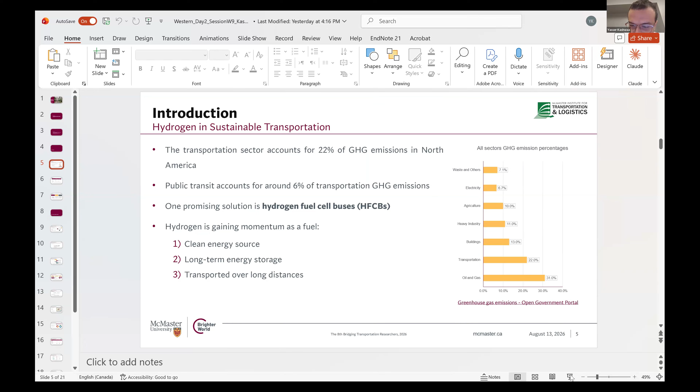Sir, if you wouldn't mind, could you share your video just so we can see you when you're presenting? Okay. Perfect, okay, yeah, continue. Okay. Is my screen appearing now? You'll just have to go into full screen mode again. Okay, yeah. Now it's appeared? Yep, yeah, okay, go ahead.

As we see in the figures, transportation accounts for 22% of greenhouse gas emissions in North America, with public transit accounting for 6% of transportation greenhouse gas emissions. So rapid actions are required, and one promising solution is hydrogen fuel cell buses. Why hydrogen? Because hydrogen is a clean energy source, it can be transported over long distances, and it can be stored for a long term. So hydrogen fuel cell buses are often viewed as a promising option for decarbonizing transit service.

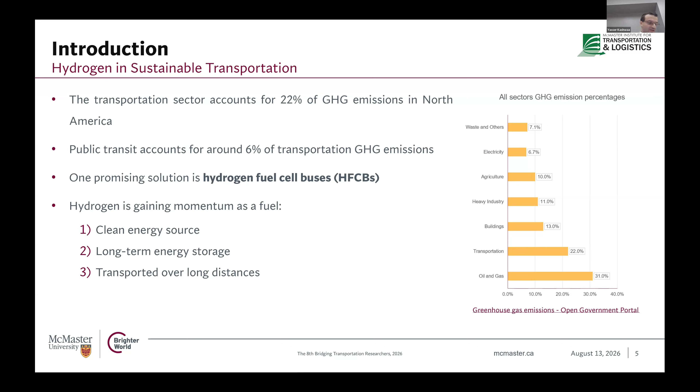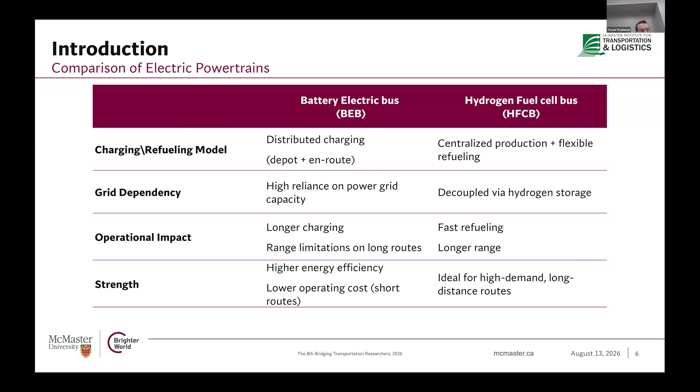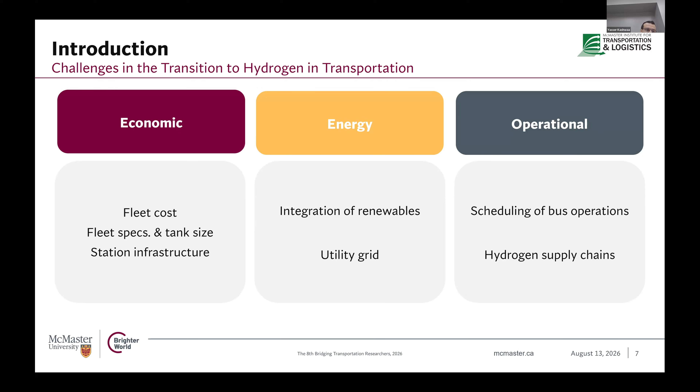In terms of powertrain comparison, battery electric buses require distributed charging depots and sometimes en route charging, and can be constrained by grid capacity and longer charging time. On the other hand, hydrogen fuel cell buses can use centralized production and flexible refueling with faster refueling, suitable for high demand and long distance routes. But transitioning to hydrogen in transit systems faces several challenges, classified as economic challenges, energy integration challenges, and operational challenges, mainly on supply chain coordination and bus scheduling.

That brings us to a multi-depot hydrogen system, a real transit network with multiple depots. We face several planning questions: where should hydrogen be produced, centralized or decentralized? Centralized means producing hydrogen on-site at one depot and transporting it to other depots; decentralized means each depot has its own on-site hydrogen production. Another option is to import hydrogen from an external market. If we go with on-site production, how large should the electrolyzer and storage be?

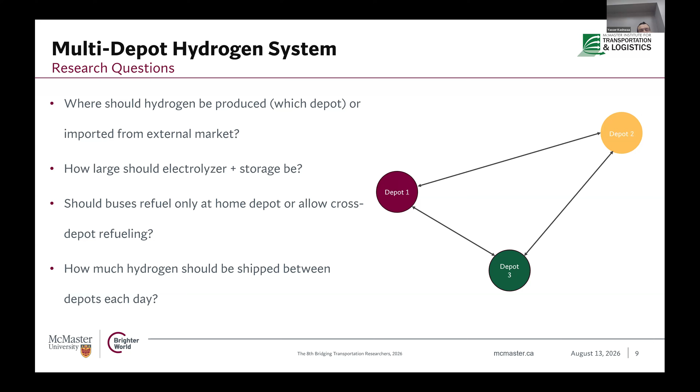Another question: should all buses refuel at their assigned depot, or allow cross-depot refueling? How much hydrogen can be shipped between depots each day if we suggest centralized production? To answer these questions, we addressed them in our journal paper titled 'An Optimization Framework of Hydrogen Fuel Cell Buses in Multi-Depot Urban Transit Network.' In this paper, we developed a mixed integer linear programming framework that jointly optimized depot production, storage, refueling strategy, and inter-depot transport, aiming to minimize total annual cost while meeting daily service demand.

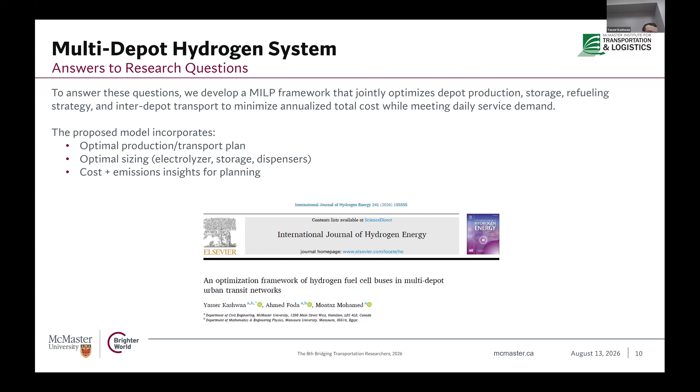The framework is designed to support integration of hydrogen fuel cell buses with multi-depot transit systems. This paper is also applied to a case study of Halifax, with 5 different configurations evaluated and compared. One key configuration is centralized hydrogen production, where one depot acts as a production hub with electrolyzer and storage, and other depots primarily serve as demand nodes that refuel buses. We then optimize when and how much hydrogen to transport between depots so that refueling demand is met reliably without shortage, while minimizing total system cost.

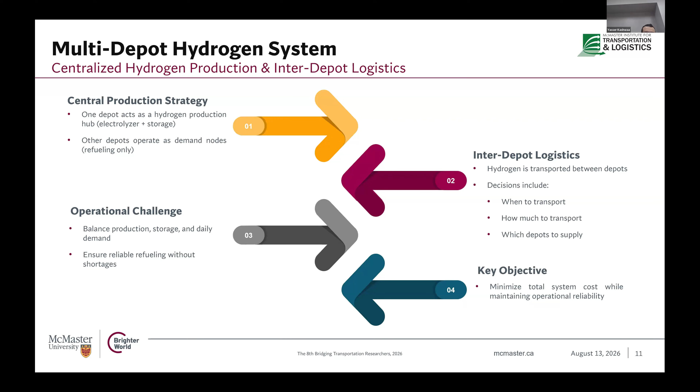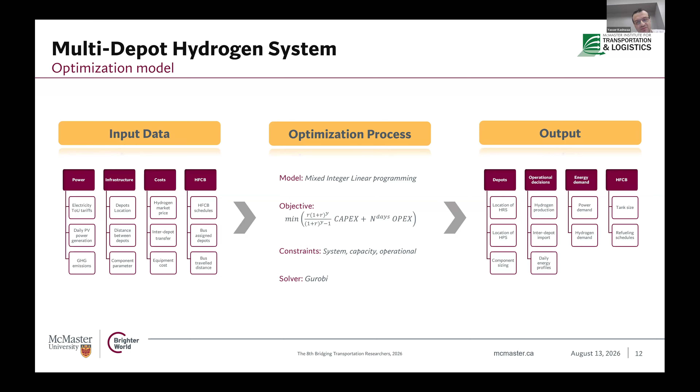Finally, the model generates the output, which identifies which depot serves as hydrogen production and which serves as a refueling hub. It also determines the optimal infrastructure sizing, including electrolyzer and storage and dispenser, and the number of dispensers required, as well as operational decisions such as daily power demand, hydrogen production levels, inter-depot hydrogen transfer, and bus refueling strategies.

The optimization model aims to minimize the total annual cost, including capital cost. The capital cost represents the total investment cost, including infrastructure cost and hydrogen fuel cell bus cost, while operational

cost included four main cost categories: electricity cost, the social cost of greenhouse gas emissions, the electrolyzer operational cost, and inter-depot transportation cost.

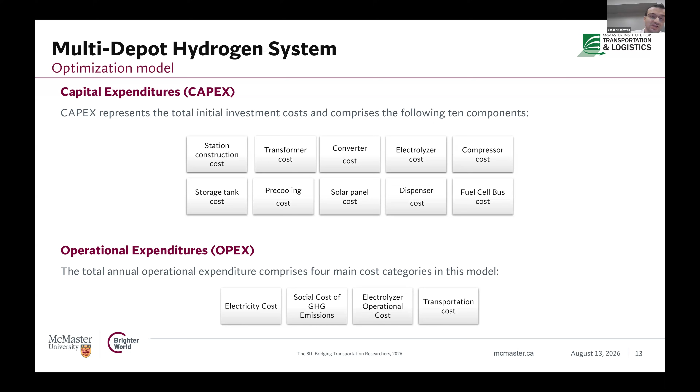We apply our model to a case study of Brampton. The data is extracted from GTFS, with around 5,000 daily trips served by 570 operating buses. In Brampton, we have 3 depots: Sandalwood, Clark, and Cadetta.

In this study, we consider the electrification of 10% of the bus fleet using hydrogen fuel cell buses, allowing us to evaluate system performance under partial transition scenarios.

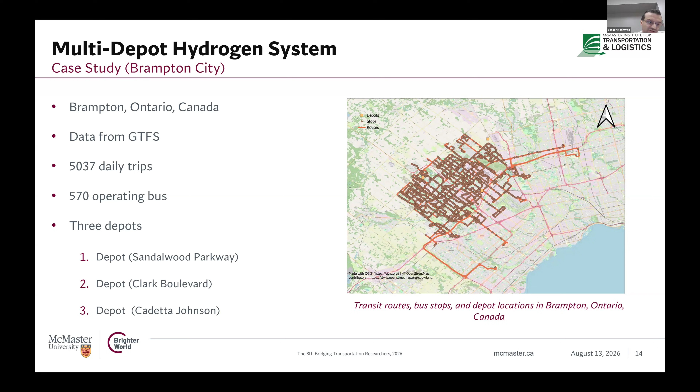Now we will head to the results. We see that the total annual cost is around 12.5 million dollars, with annual capital cost about 8.4 million dollars, and annual operational cost around 4 million.

We see that the bus cost is the largest CapEx driver. In the CapEx distribution, if we exclude the bus cost, the electrolyzer accounts for around 40.7% of the annual capex cost, and the transformer is the second highest with 30.7%.

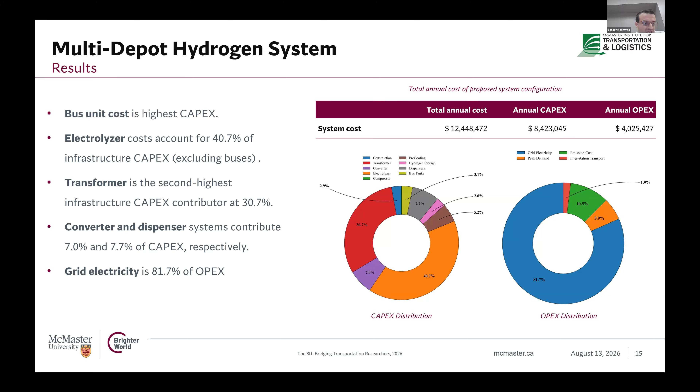On the operational side, we can see that grid electricity dominates the operational cost, with around 81.7% of total operational cost. So overall cost is heavily influenced by CapEx, vehicle cost, and grid electricity dependence.

Here are the optimal configuration of our system. The model chooses Sandalwood as the production depot. Sandalwood has 26 assigned buses. It produces daily around 1700 kilogram of hydrogen, and it exports 630 kilogram to the first depot, called Clark, and 280 kilogram of hydrogen to depot Cadetta.

From a cost perspective, we can see that the model is highly dependent on electricity for on-site hydrogen production, with an electrolyzer around 4 megawatt capacity. We also see that relying on the electrical grid is more cost effective than using other power sources like on-site solar generation.

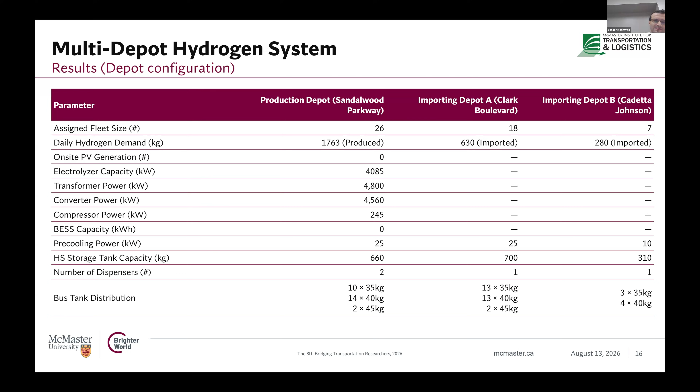This is due to the high capital cost related to the PV panels, and also the large space required, which would be restricted at the depot. The model also determines the optimal tank size for each bus, which ranges from 35 kilogram to 45 kilogram for bus tank size.

For the importing depots, there is no local hydrogen production, as shown by a flat electrolyzer line. Instead, hydrogen is delivered through import events for both depots. For the first depot it's around 3 p.m., and overnight at 10 p.m. for the second depot, in order to fill the storage and refuel the buses overnight when they finish their services.

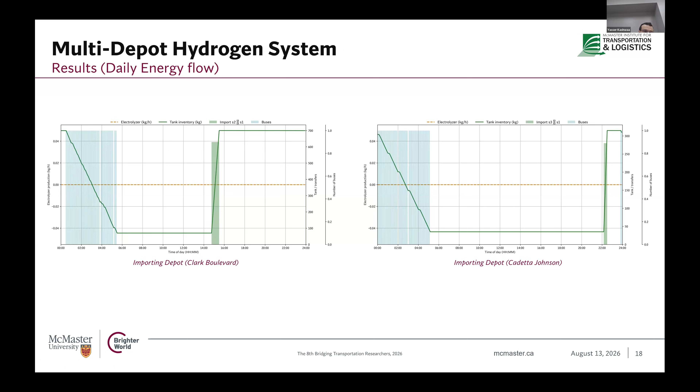To conclude, centralized hydrogen production can be economically beneficial in a multi-depot transit system. In our Brampton case study, Sandalwood Parkway is selected as the optimal production hub, producing around 1700 kilogram of hydrogen using a 4 megawatt grid electrolyzer.

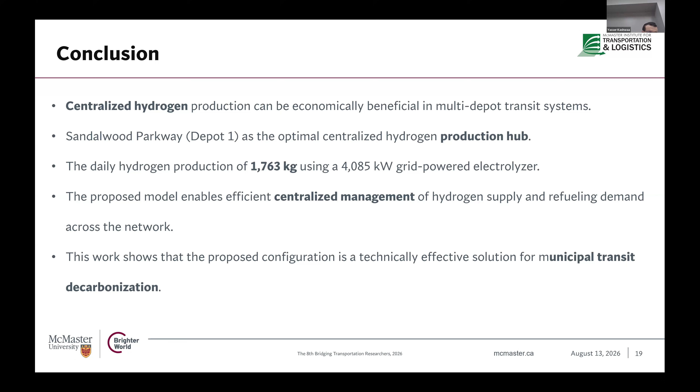The proposed model enables efficient centralized management of hydrogen supply and refueling demand across the network, and it demonstrated a technically effective solution for municipal transit decarbonization.

From a planning perspective: first, centralized hydrogen production can be cost effective, but remains strongly dependent on grid infrastructure. Second, PV powered on-site production requires significantly high capital cost and large land area, which can be limited in urban depots. Third, the primary barrier remains the high capital cost of the hydrogen fuel cell bus itself. Overall, optimization frameworks can support deployment decisions, station siting, sizing, power and energy management, and bus configuration in terms of optimal tank size and refueling patterns, aiming to minimize the total annual cost of electrifying the transit network.

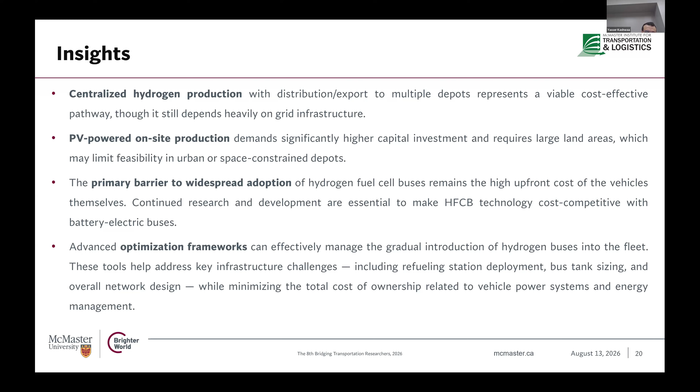And that concludes my presentation today. Thank you for your time, and I'm happy to take any questions.

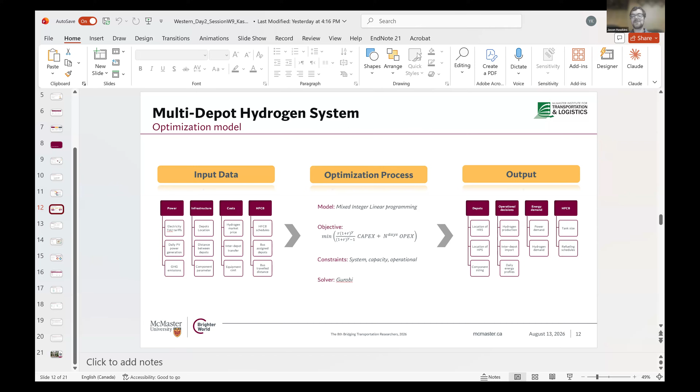Thank you for your introduction. Can you see the screen? Yep, whenever you're ready, go ahead. Sounds good. So somehow the program says I'm from Carnegie Mellon, but actually I'm from University of Michigan. My name is Miki Tsuchiya. Thank you so much for having me here.

So today I would like to talk about long haul trucking in the United States. Long haul trucking vehicles run routes from 150 miles to over 3,000 miles across the continent, which is quite long for a driver to complete. The vehicle itself is very heavy, one of the largest on the highways, carrying 10 to 20 tons of payload—a very heavy vehicle running quite long distances.

These vehicles are facing two emerging trends: electrification and automation. I would like to talk about these trends in this study. First, electrification is needed for the sector's decarbonization, but long haul trucking accounts for only 9% of medium and heavy duty vehicles by fleet size. However, it accounts for around half of medium heavy duty vehicle GHG emissions. This translates into 10% of transportation emissions in the US and 3% of the country's total GHG emissions. So we can say it is critical to address emissions in this sector.

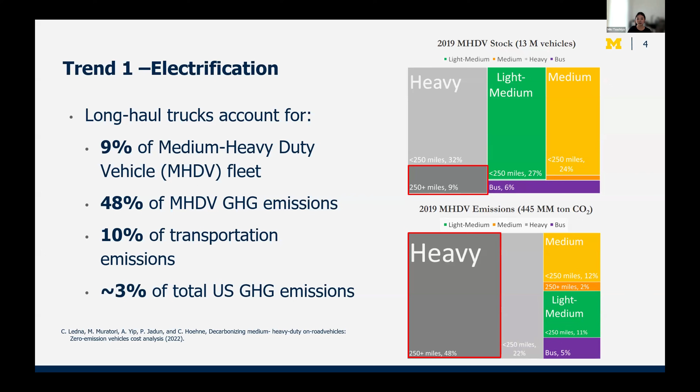Past studies have discussed and proven that electrification can reduce GHG and air pollutant emissions. However, it is generally considered very challenging to electrify these huge vehicles or trucks because it is very expensive and physically heavy. Batteries are required to compete with the 800-mile range of diesel trucks, and charging infrastructure is limited on highways for heavy-duty vehicles to access in the US.

However, the market is rapidly expanding in this area. For example, Tesla Semi covers a 500-mile range with a single charge. So the market is leaning towards electrification despite these challenges.

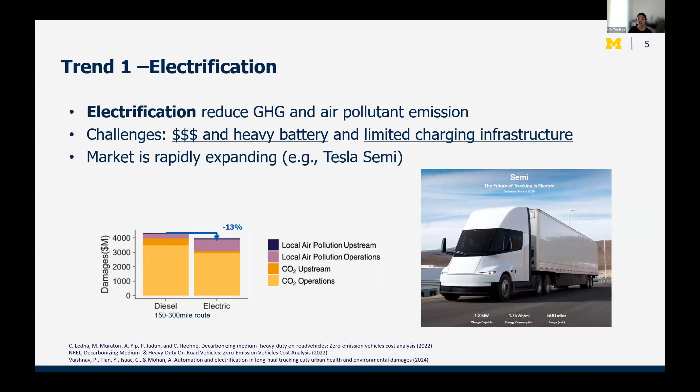So the second trend is automation. When we say automation, we refer to driverless full automation. The automated truck will remove human labor needs, which will sharply reduce cost because around 40% of trucking cost is currently human labor. We can also increase trucking productivity because machines do not have to rest like humans, who are mandated to rest for about 10 hours after a 14-hour shift. So operation cost and productivity will be improved.

However, there might be a trade-off with productivity because automation may remove the opportunity of overnight charging, like charging while drivers are sleeping overnight. So in this study, we would like to combine slow trucking, just driving slower, to see how we can maximize the benefit of automation and electrification of trucking.

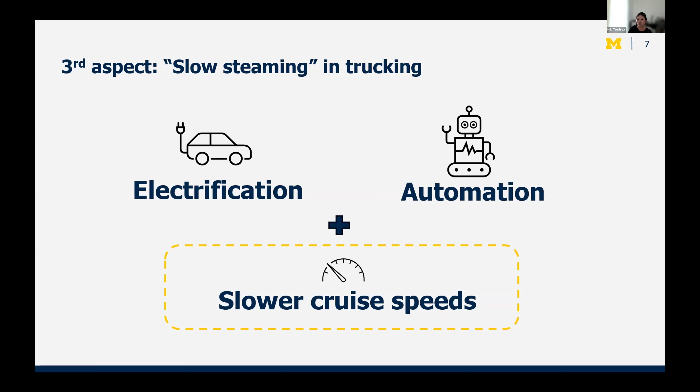So yeah, it's happening. Slow steaming is a term originally from the ocean shipping industry. That industry applied the operation of slowing vessels down to keep fuel emissions reduced, and they've successfully kept emissions constant over the decades, even as trade expanded by plus 40%. Bigger trucks are also speed-dependent, like vessels.

So combining this concept with automation and electrification might increase fuel efficiency or EV range and reduce emissions or environmental impacts.

When I present this study to colleagues or fellow researchers, people worry about the risk of crashes. If you go slower than other vehicles, can that increase the risk of crashes? Some studies have looked into this and shown it's likely to increase the risk of crashes if you go too fast compared to other vehicles. However, it's inconclusive in the case where we go too slow compared to other vehicles. We think it may end up being safe to operate these trucks slower because we assume there are no drivers on board. So we leave this discussion as a limitation and proceed with analysis based on fuel economy and productivity.

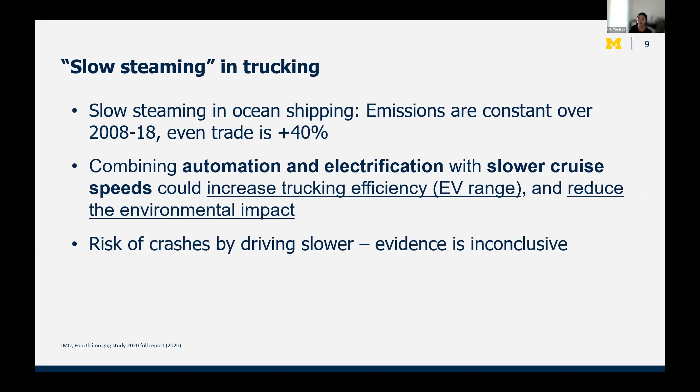So in the study, we address three research questions. One, can slow trucking increase EV driving range? Second, can automation compensate for the extra shipping time caused by going slower? Third, how much environmental and health damage can we reduce?

In our research, we assumed automation only on highway routes. The truck coming from urban roads enters a truck port, trailers are swapped to an automatic one from a human driver, and then completes the highway segment without human drivers. At the exit of the highway, we swap back the trailers, and human drivers complete the rest. This is because the urban segment is more complicated and less feasible for automated machines to complete in the near-term future.

We also compared a driving profile of 60 mph as a regular highway speed, testing 45 mph as a slow speed, since this is just above the minimum speed limit for trucks in many parts of the US.

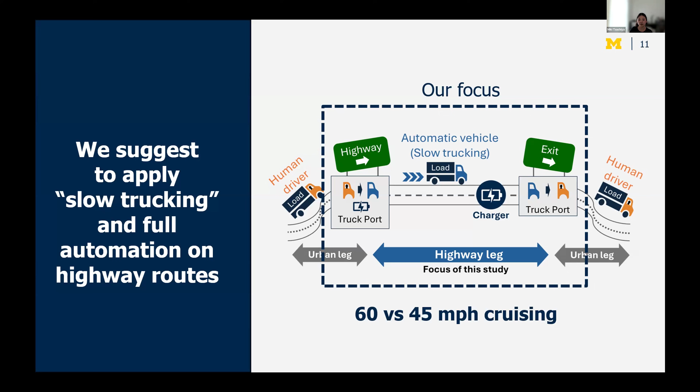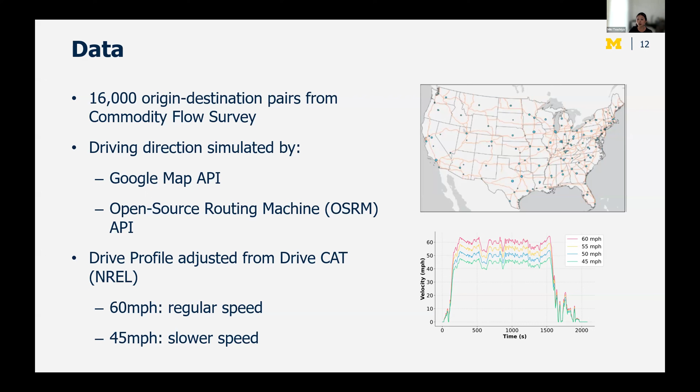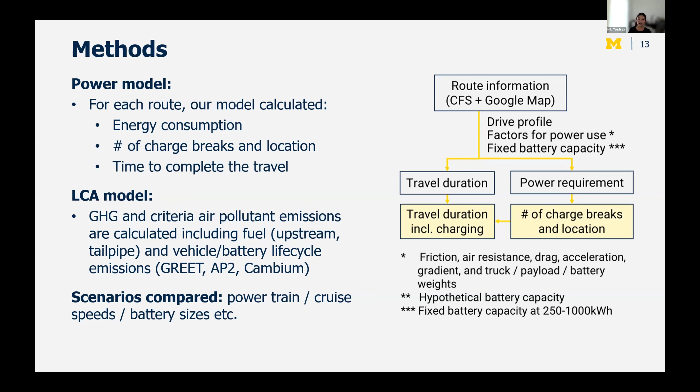We used real-world trucking routes and ton-mile shipping data obtained from the Commodity Flow Survey. We identified 16,000 origin-destination pairs, and using the Google Maps API and open source routing machine API, we got exact GeoJSON data for the trucking routes. We applied the DriveCAT driving profile to these routes. For each route, we developed system modeling to calculate energy consumption, number of charge breaks and their location, and time to complete the travel. We also used the LCA method to calculate GHG and air pollutant emissions in monetary value, considering upstream, tailpipe, and lifetime emission stages.

Okay, now I'll show you some of our results. We modeled with a 500 kilowatt-hour battery how many charge breaks a truck needs for each route with various lengths.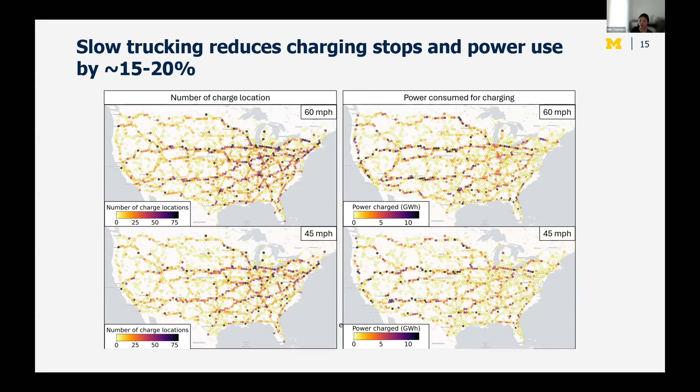We can see that slowing down can reduce the overall charging demand. The bottom two maps are slightly lighter in color compared to the top two. Overall the color is lightening, but we can see a slight shift in the location of highest demand. Some parts are lighter while others get darker when going slower, which we found interesting.

Let's move on to duration or productivity. We compared three scenarios: human drivers with diesel trucks, and automated electric trucks cruising at 60 mph and 45 mph. The human scenario includes rest periods, like an overnight 10-hour shift resting after a 14-hour shift. Electric trucks include charge breaks as needed.

The result shows that automated trucking is mostly faster than human drivers for routes longer than 650 miles, shaded in the green or blue boxes. This accounts for 60% of annual ton-miles shipped, so more than half. This is true whatever the speed is—even going slower, it's still faster than human-operated diesel trucks including rest. So we can say trucks can be automated, electrified, and slowed down without losing any productivity for those routes.

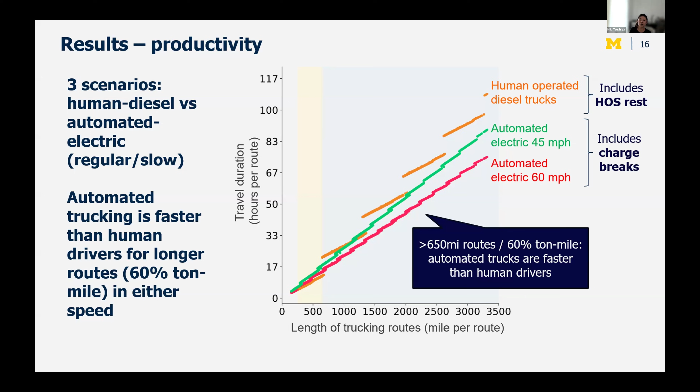For those routes, we can discuss the trade-off of truckers giving up some productivity gain to get fuel economy or environmental benefits, which we'll discuss in the next slide.

The GHG and criteria air pollutant emissions are shown here. We compared the same three scenarios from the previous slide, and found that electric trucks emit lower GHG than diesel, and slowing the truck can further reduce emissions. For total externalities, the reduction can sum up to 800 million at 60 mph compared to diesel trucks, or 2.4 billion at 45 mph—more than 1.5 billion in additional gains by going slower.

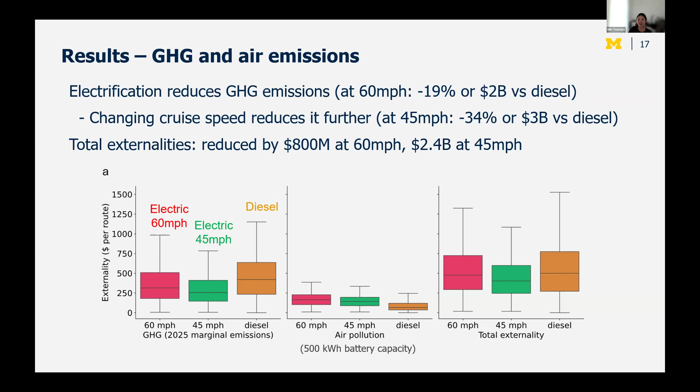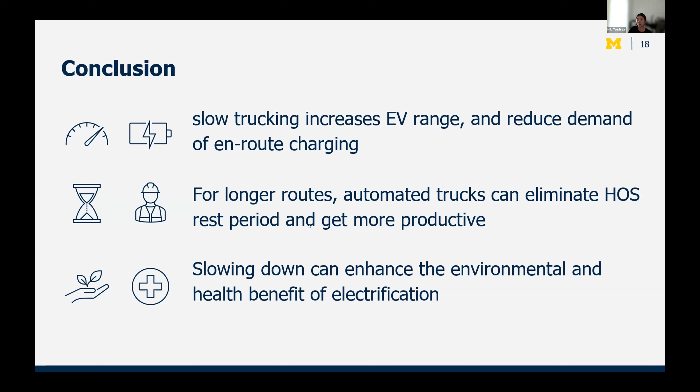This is the last slide. In terms of policy, our study has shown that automation alone on highway trucking can improve productivity and reduce operator costs for longer routes. Trucking operators may give up some of these productivity gains by going slower to reduce environmental and health externalities, and also to accelerate the transition to electric trucking.

I have to note finally that currently charging infrastructure is prohibited on interstates in the US, because it was originally restricted to protect commercial activity in towns or cities that the highway bypasses. However, automated trucks are not going to eat sandwiches or anything on the way, so that logic isn't applicable.

So maybe the policy can be updated to allow automated trucks to charge en route. Otherwise, they have to get off the highway to charge and then come back, which might be technically difficult or socially unacceptable. The policy needs to be addressed to make this system a reality.

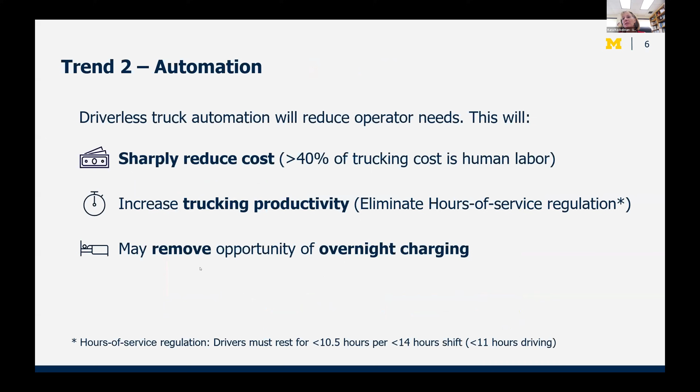Yeah, Canada? Jason, anything in Canada? Not that I'm aware of, but I was going to say, I still have a project in the US for FMCSA on commercial vehicle safety, so I was interested. I hadn't heard about this movement towards slow steaming for trucks.

That's interesting. And I guess related to that point, Andrew Moffat has a question: by traveling slower, isn't there a risk that the environmental and economic benefits for an individual truck are offset by needing higher capacity on the route, potentially requiring more trucks to satisfy the same demand?

Yeah, that's a good question. Thank you. So that is why we wanted to test how automation can factor into that issue. Just going slower, maybe if you are going slower with the diesel truck with human drivers, maybe we will need more capacity. But we are testing how automated trucks can win, or go faster in the end compared to human-driven ones, because they do not have to rest. They do not have to wait a few hours after the shift, or 10 hours overnight. So overall, they improve the capacity issues even though the trucks are driven slower, if that makes sense.

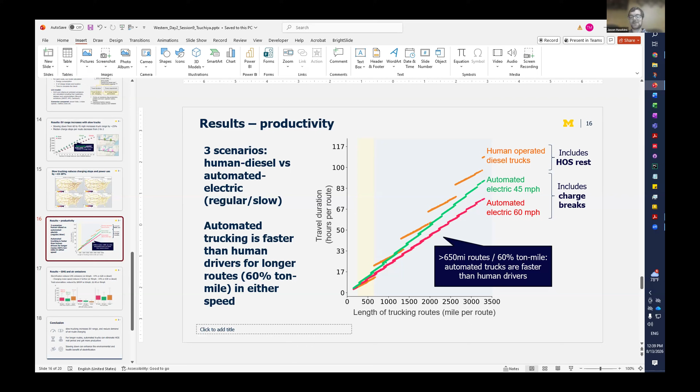Great, it doesn't look like we have any other questions, but there's some discussion in the chat box in response to Kara's discussion. So if other questions come up for Miki, feel free to put them in the chat box.

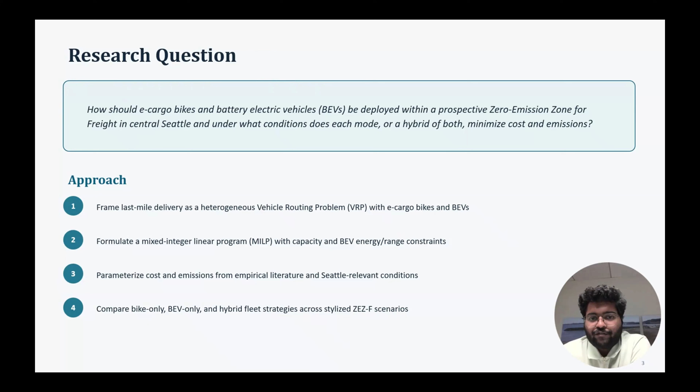Before the model, it's worth grounding in what the literature tells us about these two modes.

E-cargo bikes typically carry 1.5 to 2 cubic meters, about 10 to 15 parcels a trip, with a daily range of 20 to 40 kilometers. They shine in dense urban cores, narrow streets, bike lanes, minimal curb footprint. Battery EVs carry far more, around 8 to 12 cubic meters, around 200 to 400 parcels per route, with a much longer range of 160 to 300 kilometers, making them suited to standard road networks and longer routes.

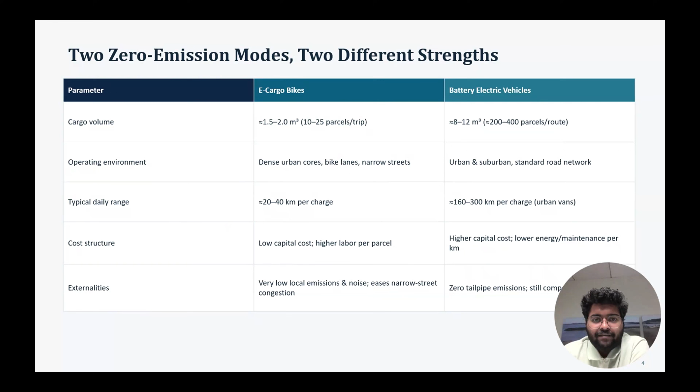On cost, bikes have lower capital cost but higher labor cost per parcel. Battery EVs have higher capital cost but lower energy and maintenance cost per kilometer. Both are zero tailpipe emission, but bikes further ease congestion and noise on narrow streets, and battery EVs still compete for curb space. To formalize this, we build a heterogeneous vehicle routing model.

Bikes are treated as low capacity vehicles that can make multiple trips from a micro depot. Battery EVs are medium capacity and range constrained, and can also act as feeders for bulk loads to delivery to micro depots and zone periphery. Both modes serve customers within the zero emission zone for freight under shared constraints.

The objective is to minimize total generalized routing cost, time plus energy, across all vehicles and arcs. Key constraints are every customer is visited exactly once, flow is conserved at each node, and routes start and end at the depot. Vehicle load can never exceed capacity, and for battery EVs specifically, energy consumed between nodes can't exceed remaining battery charge, with recharging modeled at designated nodes.

Small instances we solve exactly with a MILP solver. Larger, more realistic instances use a math heuristic combining MILP relaxation with neighborhood search.

For Seattle scenarios, we ground our parameters in the literature. E-cargo bikes have energy use of 0.01 to 0.02 kilowatt-hour per kilometer, and daily range of around 20 to 40 kilometers, with capital cost of $5,000 to $10,000 per unit, with labor per parcel as the dominant cost driver given manual handling in shorter routes.

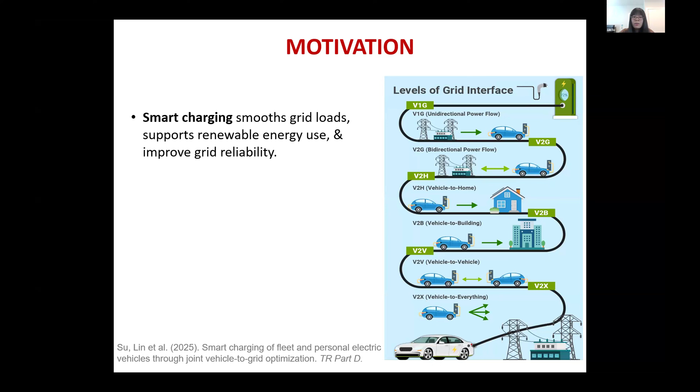Smart charging, including unidirectional charging (V1G) and bidirectional charging (V2G), provides an opportunity to better coordinate EV charging with grid conditions. By shifting charging across time, it can help smooth grid loads, support renewable energy use, and improve overall grid reliability.

Fleet EVs are particularly well suited for smart charging and V2G because they are centrally managed and generally have predictable operating schedules and controllable charging patterns. With V2G, the fleet operator can potentially gain additional revenue by providing energy back to the grid when those vehicles are idling. Household EVs also represent an important resource; although individually operated, their large population and relatively long idle periods provide potential contribution.

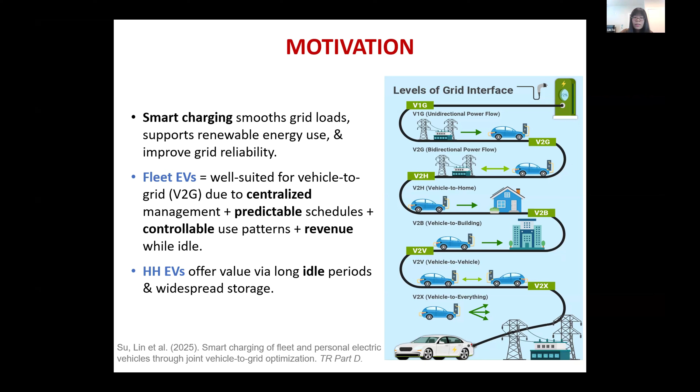However, most prior work on smart charging focuses on a single EV group, and always assumes V2G is available throughout the day, so these approaches struggle to capture the two-way feedback between optimized charging schedules and evolving system conditions. In this work, these challenges are overcome by developing a V2G framework combining both fleet and personal EVs, where V2G is only triggered under favorable conditions.

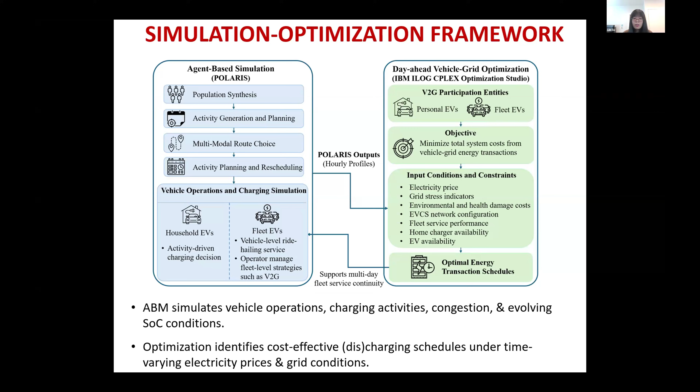This optimization framework is coded and implemented in an agent-based model, enabling dynamic interactions between charging decisions, travel demand, and system performance. The agent-based model simulates vehicle operation and movement, charging behavior, network congestion, and continuously tracks EV battery conditions. The simulated system status is delivered into the optimization model to get the most cost-effective charging and discharging schedules. This dynamic two-way feedback allows optimized charging decisions to inform fleet operation, while the agent-based model captures the resulting travel response.

The objective of this designed V2G model is to minimize system-level energy transaction costs over a simulation day. The decision variables include the energy bought and sold by the fleet, and the energy sold by households. The cost components include electricity purchase cost and the monetized environmental damages associated with energy generation.

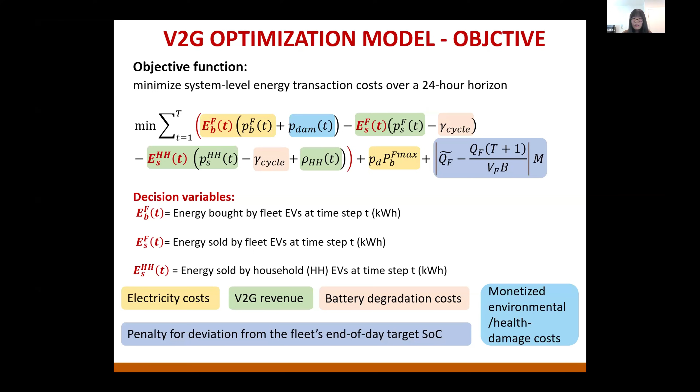When vehicles participate in V2G, they can earn discharging revenue, but at the cost of battery degradation. To maintain reliable fleet operation across multiple days, a large penalty is added for deviation from the fleet's targeted state of charge by the end of the day.

The optimization is subject to several operational and grid-related constraints. From the fleet operation perspective, energy balance must be maintained throughout the day, and to protect battery health and avoid excessive discharging, the average fleet SOC is constrained within defined bounds — in this study, between 10% and 100%. In addition, the average fleet SOC over the next several hours must remain above a minimum threshold to ensure reliable fleet service; here we assume it must maintain above 40% over the next 4 hours.

The supplied EV charging station configuration, including the number of DC fast chargers or level 2 chargers and the charger power, together constrain the energy that can be bought or sold by the fleet or household. Only if there is grid need — that is, when grid demand exceeds a certain level of supply — will V2G be triggered to allow vehicles to discharge their energy back to support the grid.

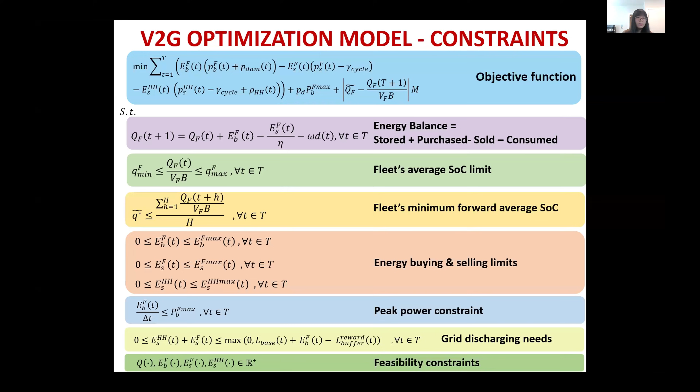The case study area is within the Austin 6-county region in the Texas state. And the EV fleet is assumed to be composed of shared autonomous electric vehicles.

They are providing ride-hailing services at a cost of $2 pickup fee plus $0.9 per mile and $0.25 per minute. For travelers willing to share rides, they can enjoy a 40% discount.

Based on the prior study, we assume a 40% household EV participation rate for the V2G. So total 4 scenarios are evaluated. The level of grid interaction is gradually increased.

From the very beginning, the last minute charging does not provide any grid support and reflects the conventional scenario. The charging behavior is totally driven by the battery status. For example, once the SOC is below 10%, the vehicle will be assigned to get recharged.

Then move to the unidirectional smart charging, V1G. The fleet charging schedules will follow the optimized charging decisions, thus reshaping the energy demand over time.

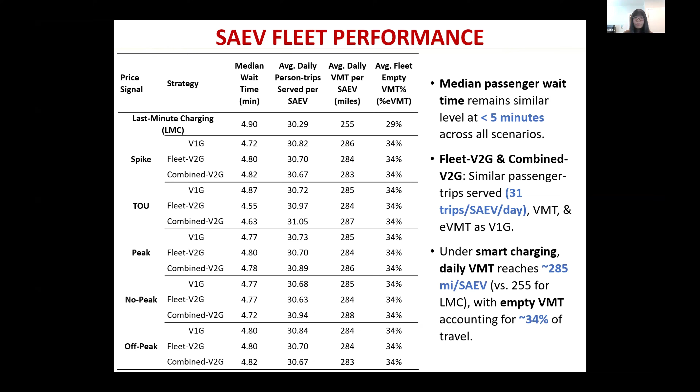From those results, we can see with a greater intraday price variation, such as under the spike and time of use price signals, the incentives are stronger for load shifting and V2G participation for the energy arbitrage.

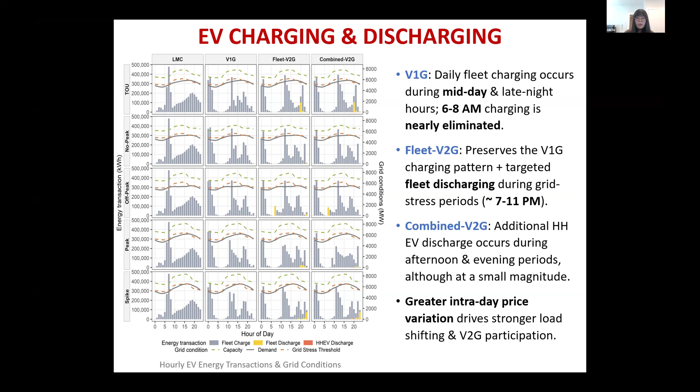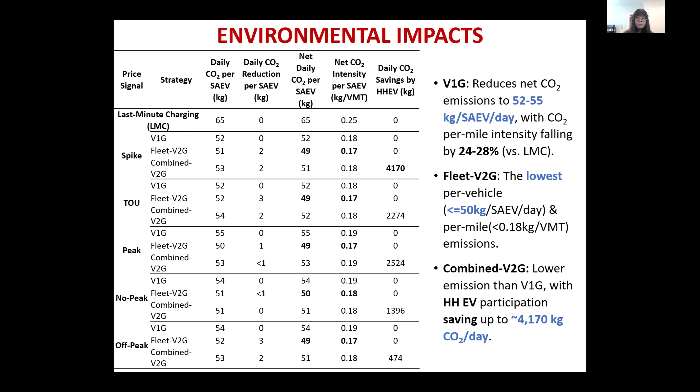Overall, the designed three smart charging scenarios represent a gradual path towards increasing level of vehicle-grid interaction. The V1G is the most practical near-term deployment and achieves the lowest implementation cost, while the fleet V2G and the

combined V2G is a long-term goal, as the V2G capable charger requires expensive upfront costs, which may discourage fleet and household EV owners from participating in it. But those costs are expected to decline as vehicle electrification and charging technology mature.

To conclude, our results show that the fleet V2G can preserve most of the operational benefits of V1G while providing targeted support to the grid. By further incorporating the household EVs, the combined V2G provides greater flexibility for grid support.

We also find that greater electricity price variation can create stronger incentives for both load shifting and V2G participation. Looking ahead, more accurate travel demand forecasting and effective coordination across the transportation and power sector remain important challenges for large-scale V2G deployment.

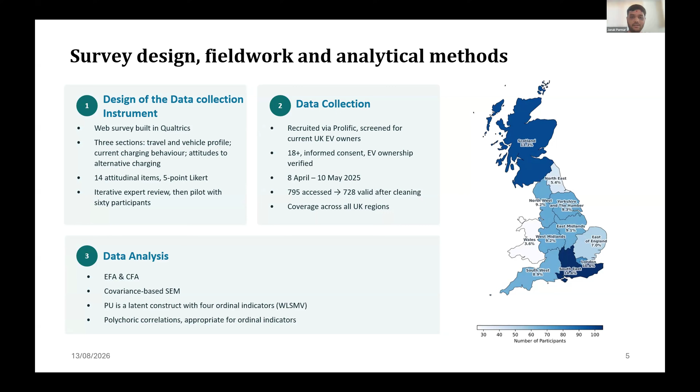So who answered our questions? Respondents were concentrated in the working age band, with 53% between 35 to 54. The dominant purchase motivation was economic cost savings at 80%, ahead of environmental concern at 60%.

These are heavy users — 64% of drivers actually drive five or more days a week, and 79% commute in the vehicle.

The sample is roughly balanced on gender, with 51% female, notable since earlier EV adoption studies skew heavily male. The key interpretation is that this is not a casual EV interest group — these are frequent users with stable private charging and relatively high socioeconomic status.

Also, please note that non-adopters, flat dwellers without off-street parking, and lower income drivers are underrepresented here, and their views may differ substantially.

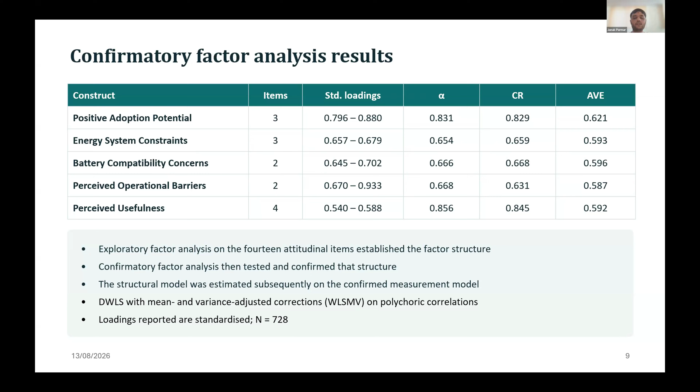Hold on that thought, I will come back to it later as well.

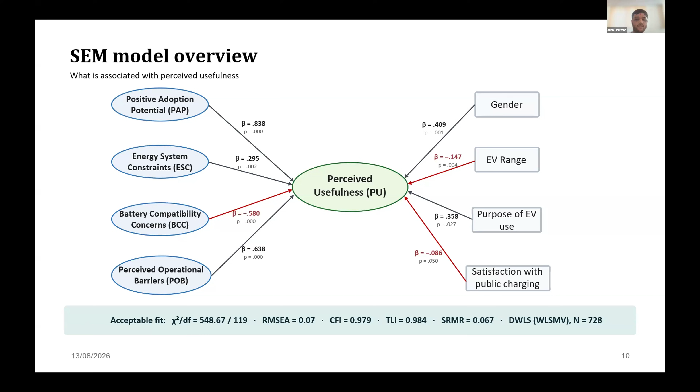So fit is acceptable again, if we see with the indices shown here. One point to mention is that these are associations, not causal effects — the data are cross-sectional.

Then interoperability doubt is the strongest barrier in the model, as we see, and then operational barriers at plus 0.638 — the informative surprise, because conceptually you'd expect people who foresee practical problems to rate swapping as less useful, but we find it positive. The reading we favor is about problem recognition: users who perceive shortfalls in the current system see swapping as the remedy for them. So the needs to be recognized and addressed for greater adoption.

That's consistent with the study I already mentioned, Kegel and colleagues — they found that BEV-interested drivers treat swapping as a problem solver. So our ongoing further analysis will test whether that holds across all users or concentrates in particular segments.

Now, who finds it useful? Women report higher perceived usefulness, consistent with the evidence from our survey that they report greater concern about charging availability and personal safety at public sites.

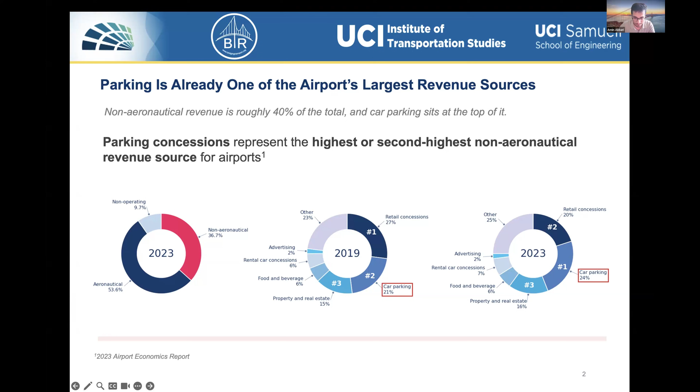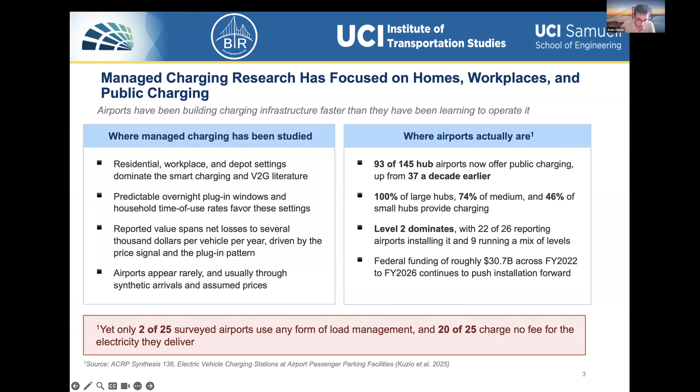So that's not a problem, actually — that could be an opportunity, because during those 20 hours you can decide when the energy flows, and even decide which direction it flows. The driver never notices, because they still come back to a full battery. But today, nobody does this. The charger just runs flat the moment you plug in, and then sits idle. So there's no awareness of prices, nothing captured from that parked battery.

So the question we are asking is pretty simple: how much is that idle time actually worth? And what has to be true for it to be worth anything?

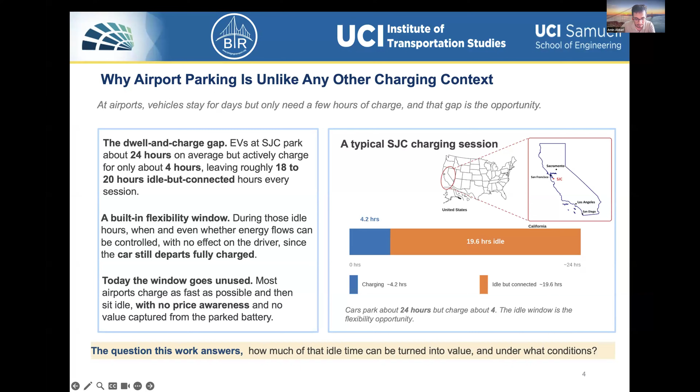There are two ways to use the idle time, as you probably already know both. The first is smart charging, or vehicle-to-grid in a limited sense — the car still only charges, energy only flows one way, but instead of charging the second you plug in, the optimizer picks the cheap hours. Same energy delivered, same full battery at the end, just bought at a better time. The second one, on the right-hand side, is vehicle-to-grid.

Now energy can go both directions — buy when it's cheap and sell it back when it's expensive, and refill before the driver returns. So the battery basically becomes a kind of temporary storage for the facility.

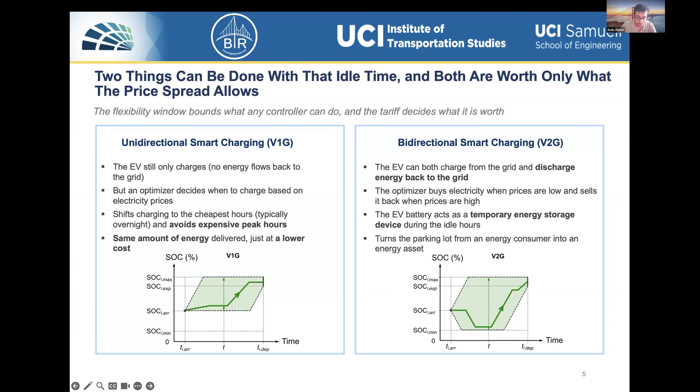All right, so here's how we set this up. Basically, we have three inputs on the left-hand side: the airport's own charging session data, which gives us when cars arrive and how long they stay and how much energy they need; the electricity prices from the tariff the facility is billed under; and the real mix of electric vehicles registered in the county.

Those basically fit into a simulator that runs a full year, moving in 15-minute time steps. It generates arrivals, samples what car shows up, and assigns it to a port. Then at each step, an optimizer decides what every connected car should do: charge, wait, or discharge in the vehicle-to-grid cases. It only executes one time step, the clock moves forward, cars come and go, and it starts again. That's kind of a model predictive control approach.

The important part is that it never sees the future. It plans with what an operator would actually know at the moment. Out of that comes the results: the charging schedule, and aggregated results like energy cost, discharging revenue, peak demand, and net profit, etc.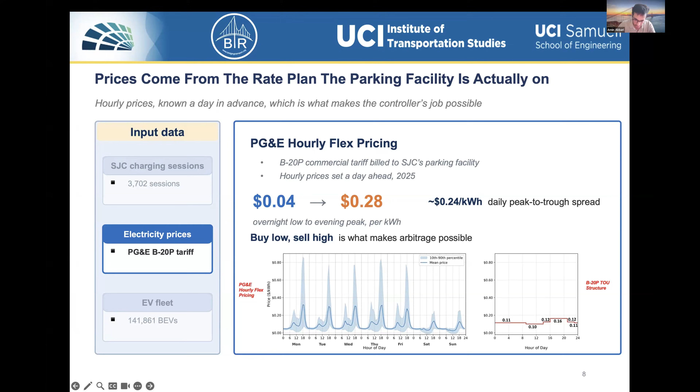That's really important because everything you're doing here is arbitrage charging — it depends on the price spread. You can also see on the right-hand side we included the time-of-use structure for the same plan. These rates are low compared to residential or public charging, which makes sense because most of their bill actually comes from demand charges.

And the third input, the cars themselves. A lot of studies assume one representative vehicle, or maybe three or four. We didn't want to do that, because battery size drives everything here — how much energy a car needs, how much it can give back. So we used the actual vehicle registrations for the county the airport is based in.

The assumption behind that was that most people using the airport parking are from this same county — Santa Clara County. As you can see here, Tesla dominates, almost 70% of our sample distribution, which makes sense for the US and especially California, and they have around a 79 kilowatt-hour battery size on average.

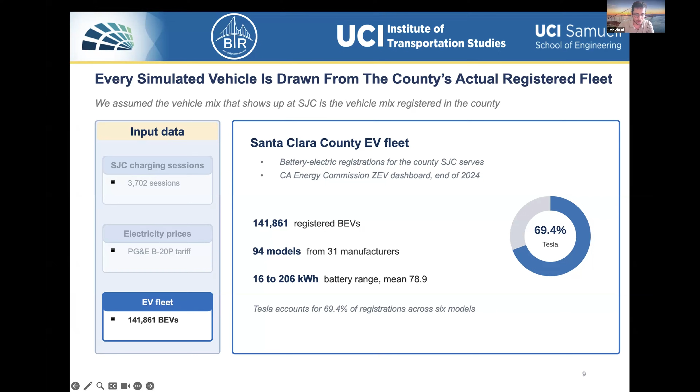So the simulator — every step, as I said, the car arrives, each one gets a battery, a state of charge, and a departure time. The first real decision after that is which port the car goes to. Here's the thing about the airport: most people are parked for a day or two, and if you're there for 20 hours, level 1 probably would be completely fine for you — a slow charger has all the time in the world.

So the rule is we use a simple heuristic approach: default to level 1. Before assigning, we check whether level 1 alone can get the car to its target in the time it has. If that's okay, it goes to level 1. If not — because it's a short stay or the battery is nearly empty or something like that — then it takes the level 2 port, which keeps the fast chargers free for the cars that actually need them.

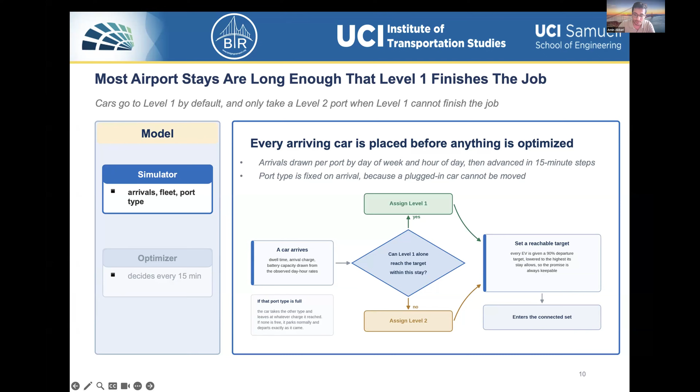One more thing before the optimizer sees anything: we cap each car's target at what it can physically deliver, so the optimizer is never handed a promise it can't keep.

Next on the optimizer, so what we built is a model predictive control, and underneath is the mixed integer linear programming. Every 15 minutes, it re-solves over all the cars currently plugged in. And the objective for us has 4 components.

Maximizing the profit from energy sold back to the grid, which is the revenue. Energy bought from the grid, that's the cost. Battery degradation, price per kilowatt hour. Discharge for vehicle to grid cases, and the demand charges on the highest moment of the week.

A few key assumptions here: prices are published a day ahead, so the controller knows them. Departure times are stated at check-in, and we don't forecast future arrivals at all. The main constraints are every car leaves at 90% - this is our assumption - and nothing goes below the 10% reserve floor in vehicle to grid scenarios, and it can't charge and discharge at the same time. Level 1 chargers can only do normal charging, so no managed charging can be executed on them.

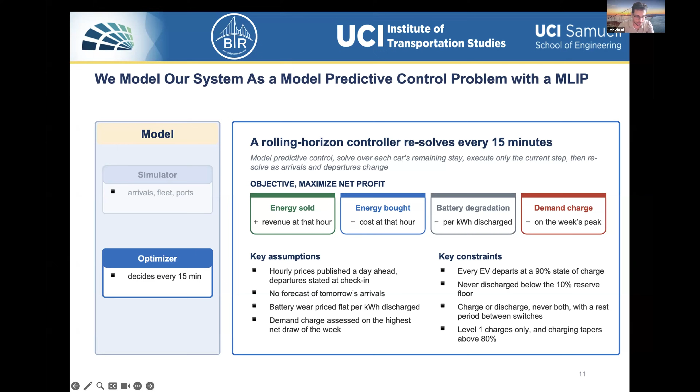Okay, so let's look at the results. This is a full year across all 3 cases: normal charging, smart charging, and vehicle to grid. First thing, the service is identical in terms of the same amount of vehicles are observed and same energy delivered, so everyone leaves at the same state of charge. So nothing that follows comes from charging less or turning people away.

Smart charging in these naive results cuts electricity costs by about 60%, same energy, just at a better hour basically, and vehicle to grid flips it - the facility stops being the cost and starts making money. But this baseline scenario has no battery degradation, no demand charge, perfect efficiency, and you sell back at exactly what you paid for. None of this is true in the real world, obviously, so treat this as an upper ceiling or upper bound, not a forecast.

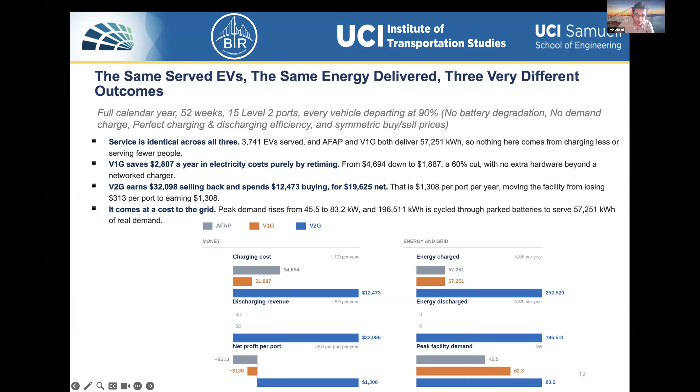So now let's change one of those assumptions in the baseline one at a time and see what happens. For example, battery degradation is the one that hurts the most. The whole idea of vehicle to grid is that you cycle someone's battery and the battery wears out. So once you start charging even a small amount of that wear, pushing to the high end of what the literature suggests, the optimizer basically stops discharging altogether.

And the sale price, for example, is more straightforward. If the utility pays you less for what you send back, you send back less, and it scales pretty much 1 by 1. Efficiency is where the 2 strategies split. Every time energy flows in or out, you lose a little. For smart charging, that's just overhead - you still owe a driver a full battery, so you buy more to cover the loss.

So for vehicle to grid, it's the opposite - you pay the loss twice, once in and once out. So some trades stop clearing, and it just does fewer of them.

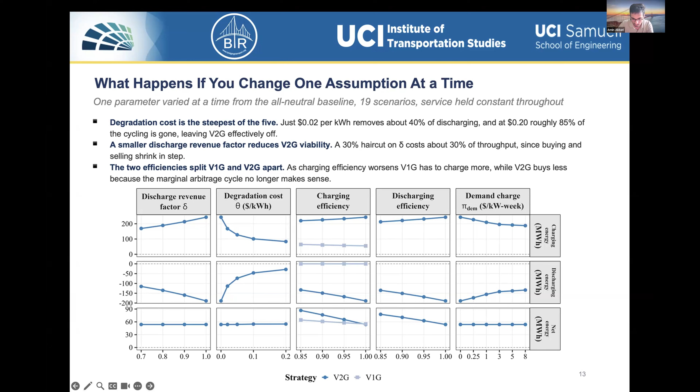But let's look at the demand charges. So looking at the left side, where there are no demand charges at all, smart charging peaks 37% higher than just plugging in and doing normal charging. Vehicle to grid would be like 83% higher. So the managed charging strategies here are actually worse for the grid than doing nothing. And that makes sense when you think about it - why? Because if you tell an optimizer to find the cheapest hours, every car goes to the same cheapest hours and everyone pulls in at once.

So now by adding a small amount of demand charges, smart charging peak drops 60% below the unmanaged charging, and suddenly it becomes the best option for the grid instead of the worst. And that actually flattens out - going to the higher amount barely moves anything. So almost the entire response is basically bought at the very low end.

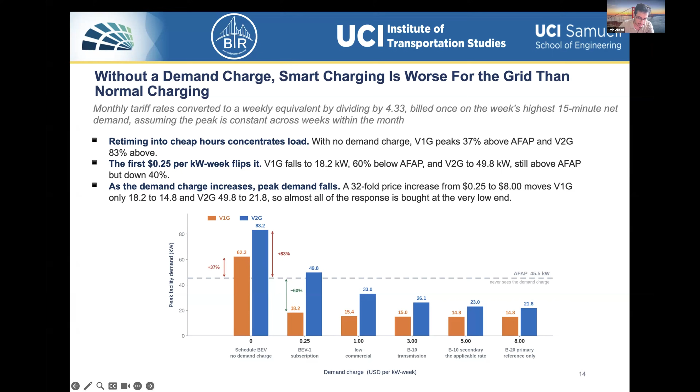All right, so next set of results, same 5 parameters here, but now we're looking at what the facility actually earns week by week across the year. The demand charge is the only one that wipes out the value, at the rate that actually applies to the site.

At this size, about two-thirds of the profit is almost gone. Battery degradation eats into it faster than anything else, but it never quite kills it. So even at the top of the range we tested, a typical week could still make money. And efficiency barely matters—we pushed it well past what real hardware does, and it only costs about 15%.

But the thing I would really ask you to look into is how tall and wide these boxes are. The week to week variation is huge. Some weeks lost money even in the best case. So this isn't a steady daily arbitrage. Most of the value comes from a small number of weeks where the price spread happens to be unusually wide. That should also be mentioned.

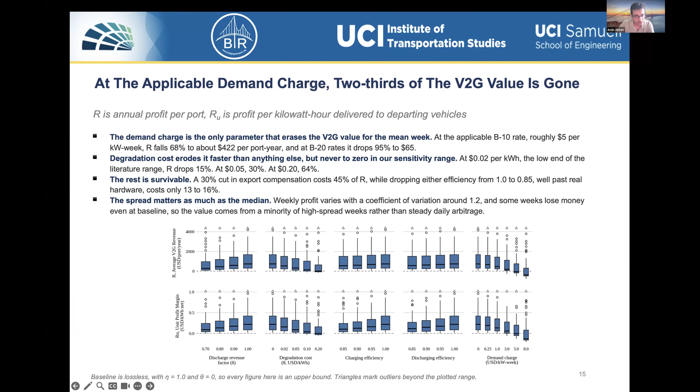But so far everything I showed you assumed 15 level 2 ports. Now let's change the charger types themselves. Level 1 is much better for the grid. All level 1 caps the site at about 16 kilowatts instead of 83, so we don't have the peak demand problem anymore—that's an 80% cut, and you get it without any controller at all. But level 1 can't discharge, and neither does smart charging, so the whole revenue side disappears.

In terms of the service question, everyone still gets a port in all three cases because we have the same number of vehicles served, but it still depends on how many ports there are and not how fast they are. What changes is how full people leave.

So in the mixed scenarios, 94% still hit the departure state-of-charge target. On level 1 charging, it drops to 77%, so nobody gets turned away—some people just leave with less charge. The mix is kind of a sweet spot we found. For example, in our scenario it would be like 8 level 2 and 7 level 1.

Peak drops by 40%, and it's still profitable. That works because of the rule from earlier: level 1 only gets the car it can actually finish.

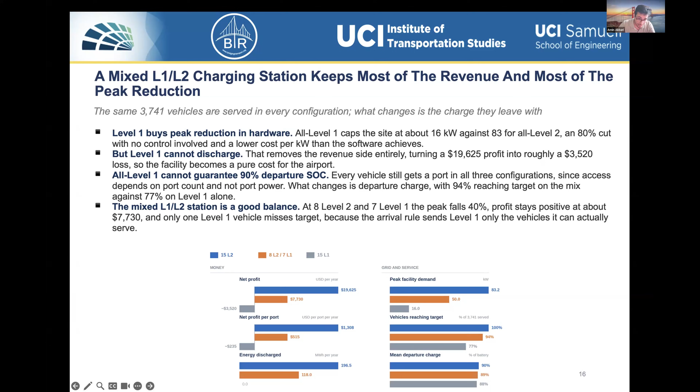One thing we're saying here is that we are not optimizing which car goes to which charger—it's a simple rule we applied when the car arrives. We think that if you did optimize that assignment and put it into your optimization, these numbers would probably get better. And now the last slide.

So four takeaways from this research. First, smart charging is the easy win for the airport—60% of the electricity bill savings, no new equipment, and it held up under every single scenario we tested, and almost nobody is doing it. Based on that report, only 2 airports out of 25 are doing it right now.

Second, vehicle to grid does work, but it's fragile and not reliable. If we change those parameters a little, all of that profit would be taken away and gone. Third, and this surprised me, the cheapest is not the same as the best for the grid—without demand charge, managed charging actually makes the peak worse. So a small demand charge can actually fix it.

And the fourth one: the charger mix could be the real design choice for airports. Splitting level 1 and level 2 cuts the peak by 40%, and it still makes money. So for the airport today, I would say do the smart charging, and for utilities, the tariff is what decides whether any of the rest of this is worth doing.

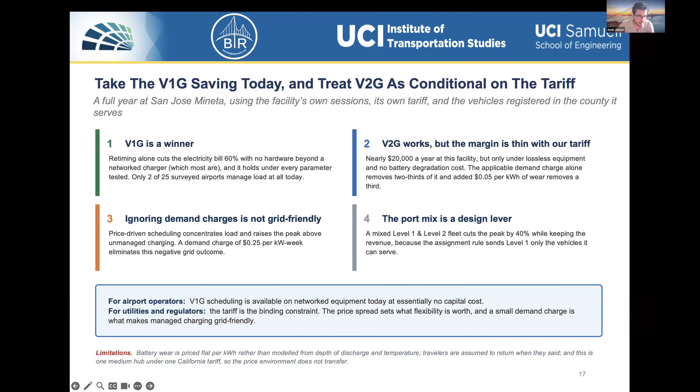And yeah, thank you so much for listening, and happy to take any more questions that you guys have.

Great, great. I mean, very, very interesting, I think, in this session to see the diversity of applications on this topic. Are there any questions? I can see in the chat we've had a bit of a discussion on parking costs. Jane Gould mentions that at Logan Airport in Boston, they offer free charging for ride-hail drivers in a nearby off-site location. Any questions though?

Yeah, that's true—unfortunately most airports in the US offer free charging. They still charge for parking though, and that could actually be the problem, because you kind of put the ceiling of people's utility high, and later on if you want to change that, if you want to execute these kinds of programs, you'd probably have to expect how that changes people's utility. This research I just showed you assumed that we do not consider people's acceptance at all—we assume everyone opts in and agrees with the terms and conditions.